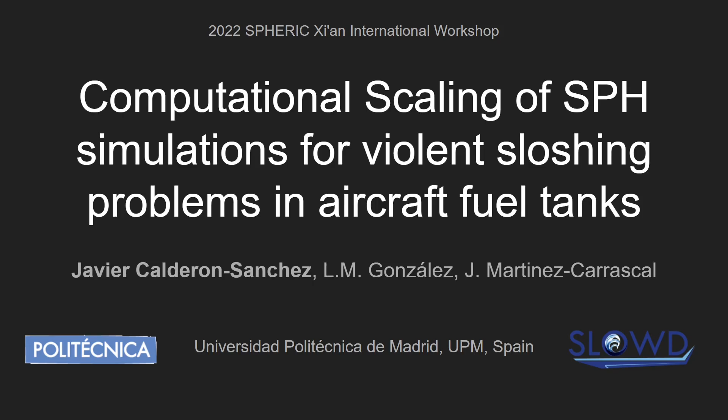This work is titled Computational Scaling of SPH Simulations for Violent Sloshing Problems in Aircraft Fuel Tanks. It is part of a broader project developed by several European institutions that assesses the damping effects of sloshing on wing motions in order to minimize them. The project is called Sloshing Wing Dynamics, or SLOWD.

This is the outline of the presentation. I will start by introducing the SLOWD project, which will serve as a first step to discuss the problem description and how we identify the main parameters that become the inputs of the dimensional analysis performed.

Using that as a base, the single-phase SPH model used for this problem will be described, emphasizing some particular but important aspects. Then I will present how this model is coupled with a single degree of freedom mass spring damper system in order to obtain a complete fluid structure interaction problem.

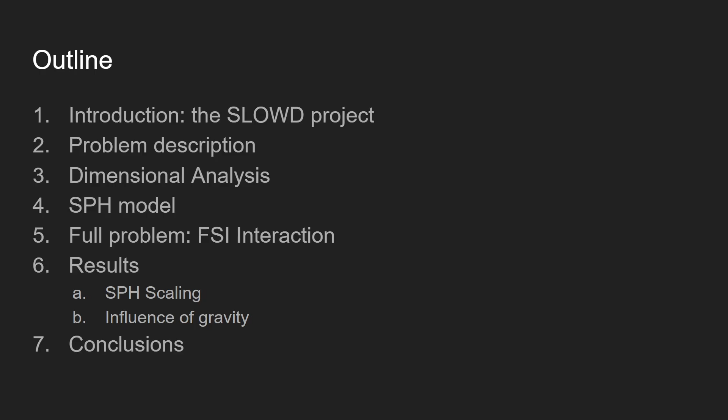The two numerical campaigns we present at the conference are then discussed: the numerical scaling and the influence of gravity. Finally, a set of conclusions is drafted.

The aim of the SLOWD project is to investigate how the use of fuel slosh might help reduce design loads and motions on aircraft structures. This is a phenomenon particularly important at critical operations such as aircraft landing. Being able to quantify energy dissipation effects associated with liquid motion means one can increase damping up to 50%, greatly reducing deformations and structural demands.

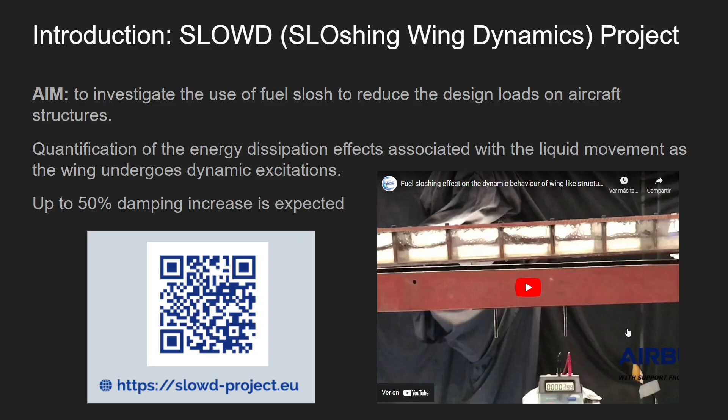You can find here a link to the project website, as well as a video that will illustrate the characteristics of the problem to be evaluated.

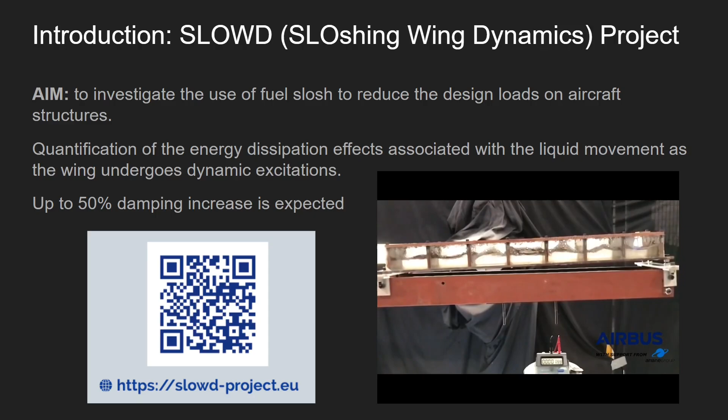As you can observe, very violent motion is attained, reaching up to 10g accelerations. Fluid is highly fragmented and several impacts to the wall occur, meaning that, as you can imagine, the numerical computations are a challenge.

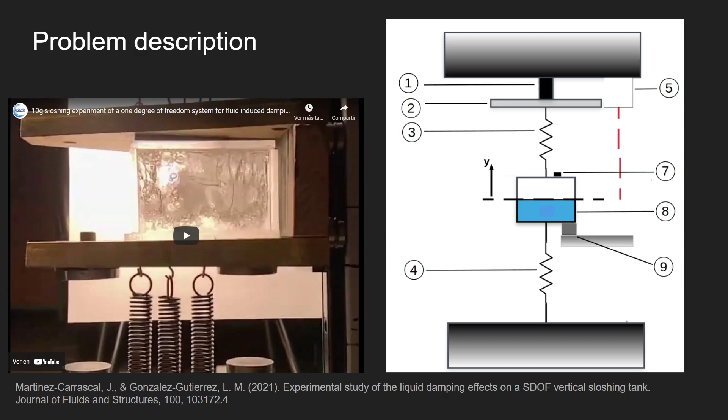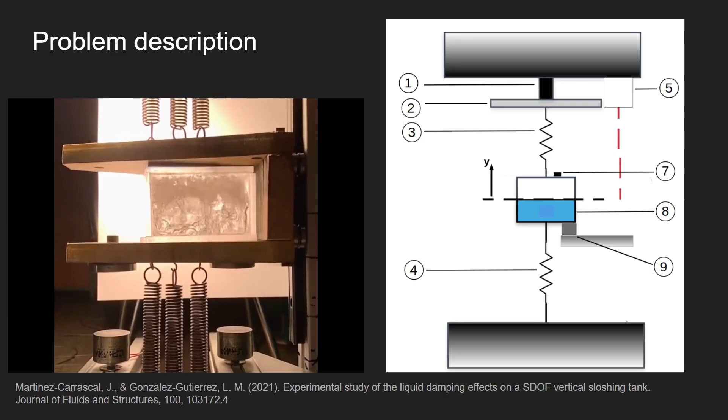In order to isolate complexities as much as possible, at UPM a simplified version of the problem has been extensively tested. The box is released and a 1 degree of freedom decay test is carried out, reducing the structural modeling just to a mass spring damper system and measuring accelerations, motions and forces at the tank. However, the complex behavior of the fluid remains exactly the same.

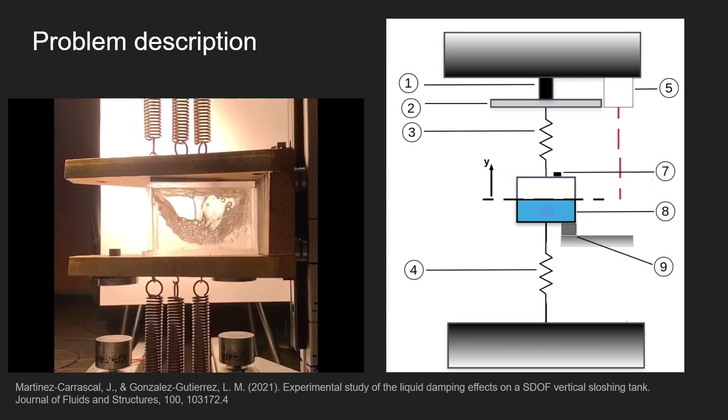However, from experimental extrapolation, scaling effects might appear due to intrinsic limitations linked to the fact that existing fluids have certain characteristics. In order to avoid them as much as possible, the use of a well-validated numerical tool can be extremely helpful.

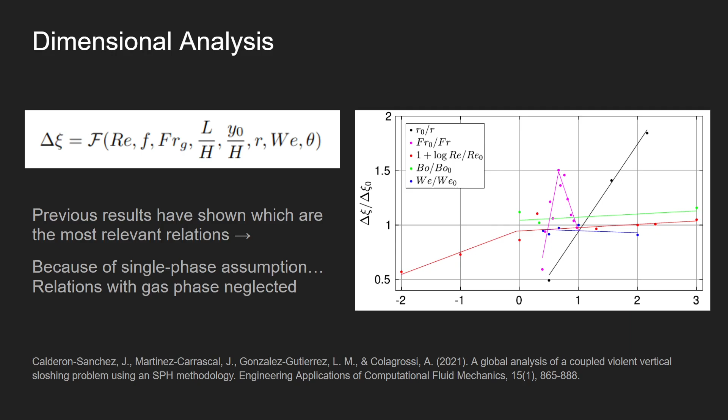So in our problem, the relevant experimental parameters can be scaled according to certain laws, and the resulting variables also have a scale-dependent expression.

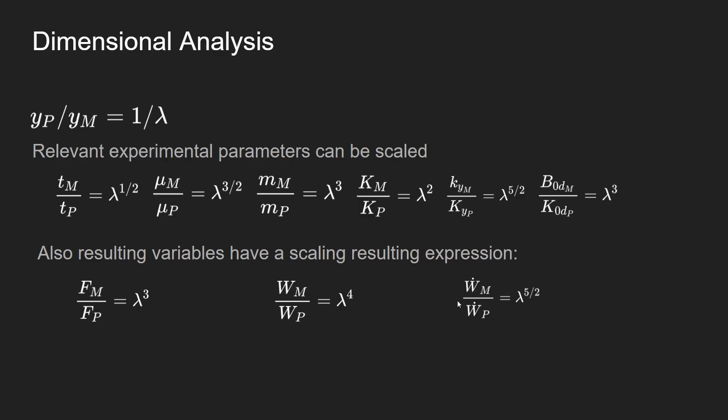Regarding the SPH model implemented, a weakly compressible SPH formulation is used. Dissipative terms are included both at continuity and momentum equations in order to stabilize the scheme, namely delta-SPH and the alpha term respectively.

Additionally, a surface tension is added following the expression given by Morris, and the interactions with the wall are done with the boundary integrals formulation.

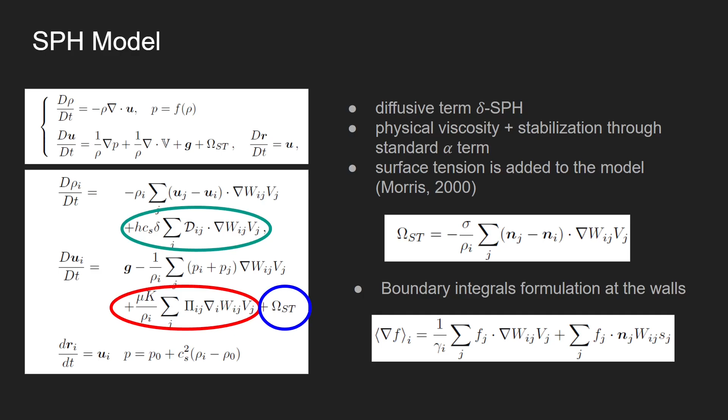It is important to note here that evaluating the normals correctly is critical in this problem.

Have a look at the image in the slide that shows one of the jets that are created at different stages of the simulations. In order to achieve that, we follow the work by Pengnan Sun in 2017, even though we are aware that this is an open topic gaining attention from the SPH community. We leave you here a more recent reference where accurate modeling of surface tension is discussed.

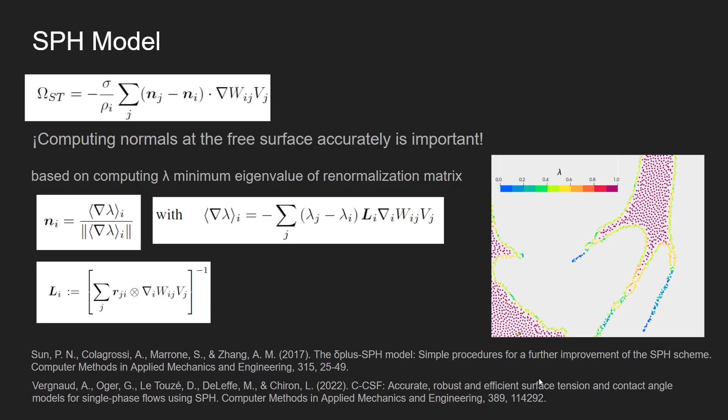In order to couple the problem, making it dependent from the SPH solution, as we said, a 1 degree of freedom mass spring damper system is used.

The K corresponds to the stiffness of the springs, and B0 and B1 are the damping constants. Both damping and stiffness constants are obtained from dry experiments. Forces are computed by SPH, and they do so according to the following expressions.

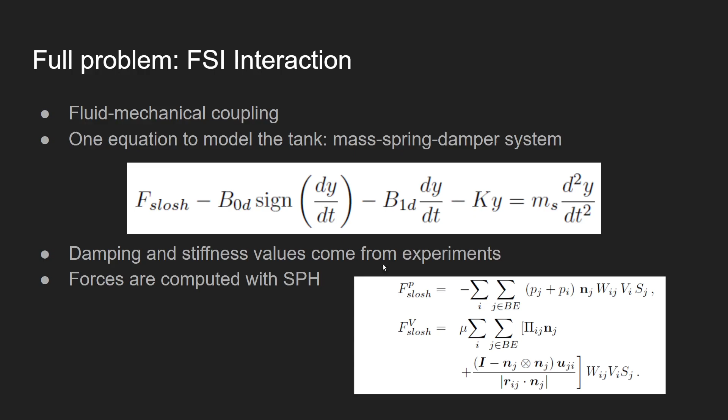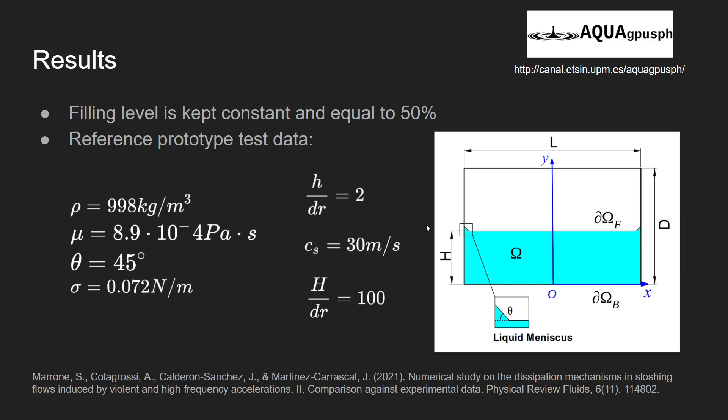So, the two numerical campaigns that I am about to present have their base on the reference prototype test data that corresponds to water at 50% filling level. For more details of this prototype test data, or this base data, you have the reference here below. Simulations in this work have been carried out with the fully free SPH software AquaGPUSPH.

Regarding scaling, this slide presents 4 figures corresponding to the main outputs of the simulation: the acceleration of the tank, and the force and work done by sloshing forces. As you can see, results are very similar for the 3 scales tested, so we can say that no scale effects are present and the scaling is working properly.

Note that there are subtle differences in the forces, especially noticeable at first stages, that have an impact on acceleration and work done curves, both magnitudes that, as we say, depend on the force.

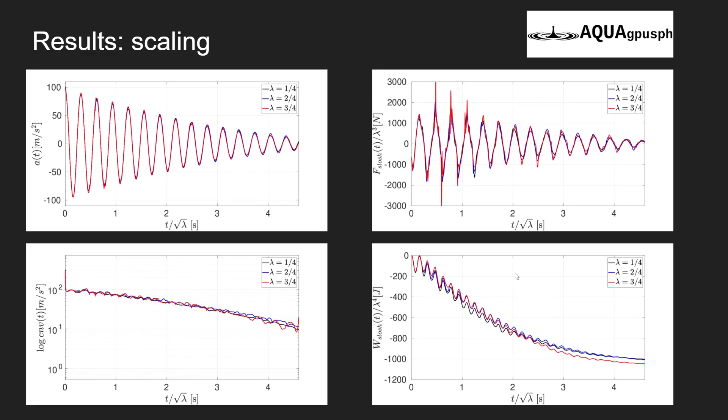Whereas for gravity, 3 different values have been tested: gravity at Earth, denoted by G0, and 1 below and 1 above this reference value. Additionally, 3 different facilities have been tried, changing mainly the damping values in order to generate an underdamped and an overdamped system to analyze the effect of the experimental facilities. Then, 9 cases in total are presented.

We can say that reducing the value of gravity below the reference one has little impact on the result. But this is not the case when it is increased. Having a greater gravity value, closer to the initial acceleration, plays a role on the fluid behavior that returns to rest faster, having a solid block-like behavior from previous stages, and hence reducing damping, which is linked to fragmentation and impacts.

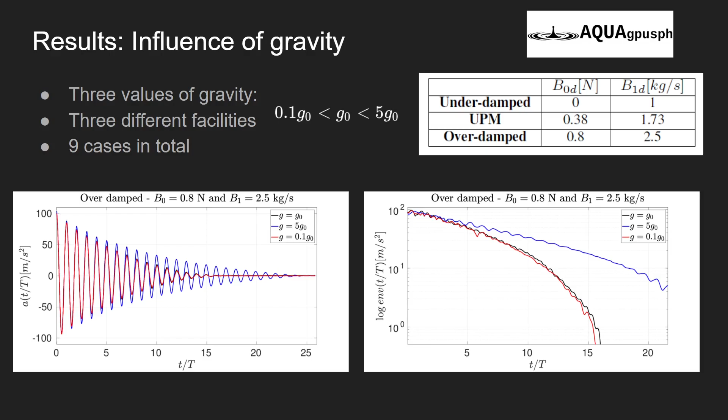So, just to sum up, a fully coupled fluid structure interaction problem for vertical sloshing has been implemented using a single-phase weakly compressible SPH model that includes surface tension.

2 numerical campaigns have been presented in order to assess the influence of scaling and gravity respectively. From gravity, we can say that it is relevant when values come close to the initial accelerations that force the fluid to return to rest faster.

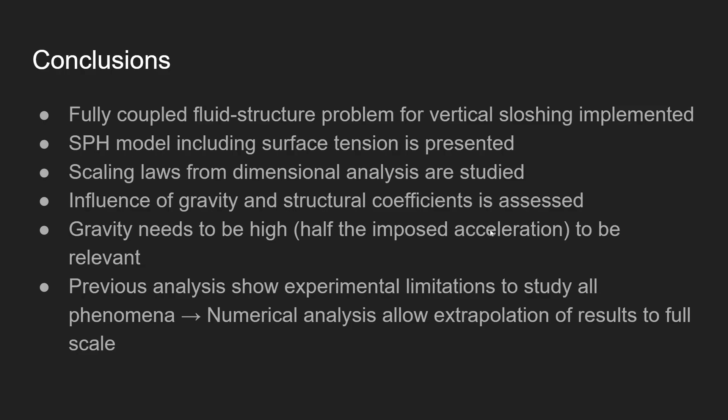Scaling process is necessary to predict wing loading at full scale. Experiments might be limited at some point of the process, and there, numerical analysis becomes important to allow extrapolation. Having a well-validated tool becomes then crucial to obtain a successful result.